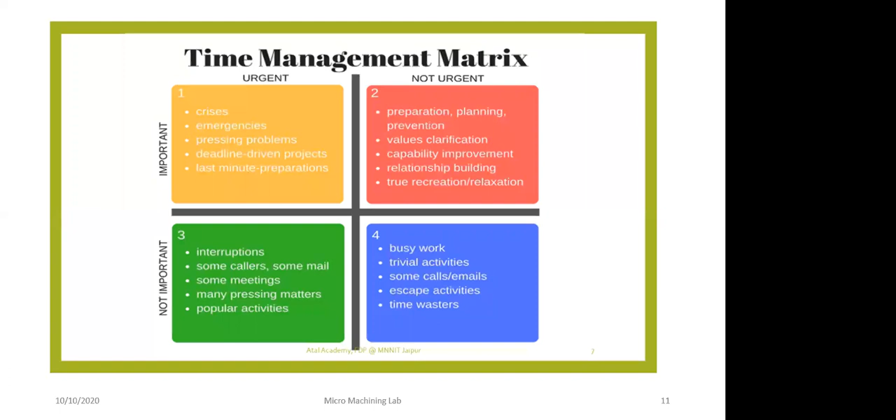Every day, start putting this table together. When you do this, you do clustering of your events, what you are supposed to do. Once you do that clustering, you will know how much time you can allocate for each event. From here, you will realize that time management is very important. For doing innovation, time management is important, and we are trying to develop so many things.

Here are two processes I would like to bring in front of you. The first process is incremental forming. Incremental forming is a metal forming technique which is exhaustively used for sheet metal forming. Here we don't use a die, we don't use a punch, but we use a forming tool where the tool end is circular and has point contact.

So you keep a die or something else and just allow the forming tool to move on top of this die, creating a shape just like machining. So look at it - without a die, without a punch, you are able to make profiles or sheet metal parts. This process is called incremental forming, and it's one of the most flexible processes, where the batch size can be thought of as one.

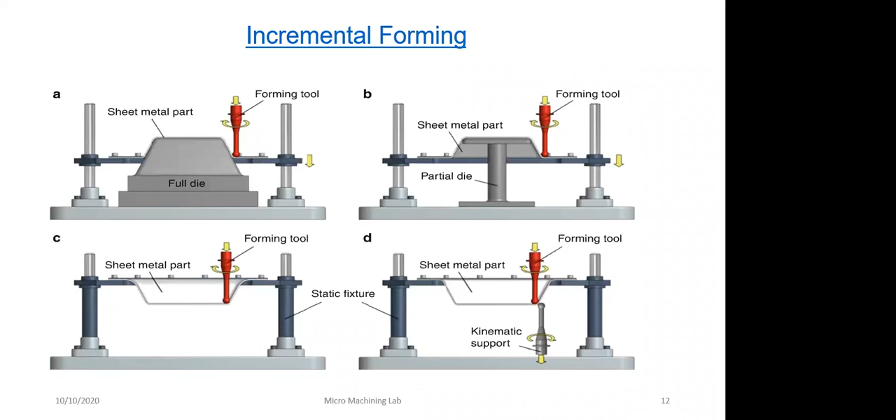The next one is rapid prototyping, which was initially called that, but now the name has changed and people have started calling it rapid manufacturing. In rapid manufacturing, people are trying to produce whatever the part is - not a prototype, but the final part itself. This makes it much more interesting and makes the batch size one. It is not one technique, there are several techniques under it.

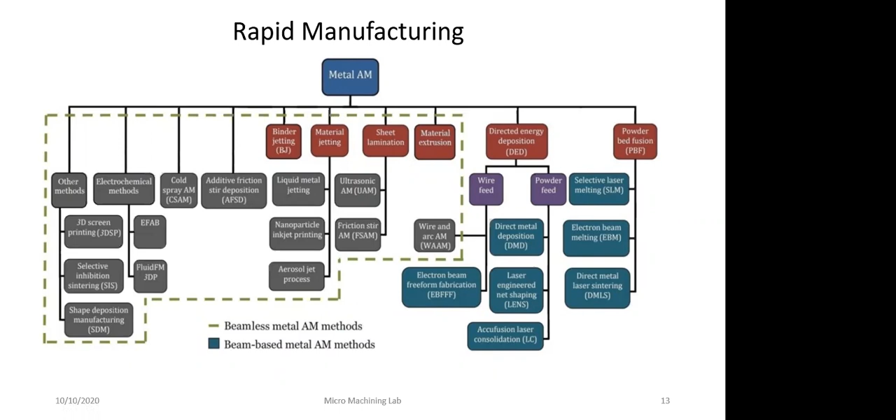They are classified as beamless metal additive manufacturing and beam-based. Beam-based uses electron beam, laser beam, or ion beam. Beamless is basically where an adhesive is dropped and joins the powder, and then we take it for a sintering process to get the product done.

Today, if you look at a conventional product, after doing topology optimization and other things, we are trying to make products of a different kind. The product shape completely changes. It is now able to work at very high functionality, the geometry is changed, and we are trying to make lightweight, high strength, highly functional, multifunctional products to meet the requirements.

Whatever was the core area filled by metal, now we have made a unit cell concept and we raster it, producing it inside. So this part will be light and multifunctional. Conventionally, a 450-gram plastic part, after topology optimization in additive manufacturing, has reduced in weight to 315 grams. So the weight is reduced, the functionality is enhanced. All these things are possible by metal printing.

This is the next important thing. I'm just introducing two processes in front of you: one is incremental forming and the other is rapid manufacturing. Here, typically, the batch size is one.

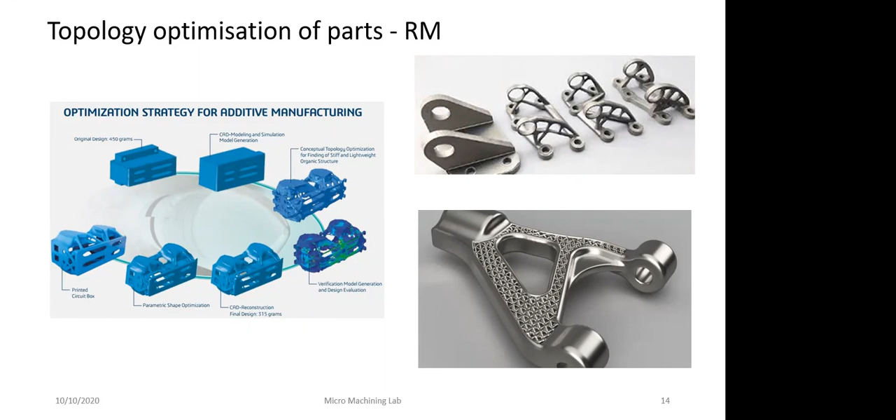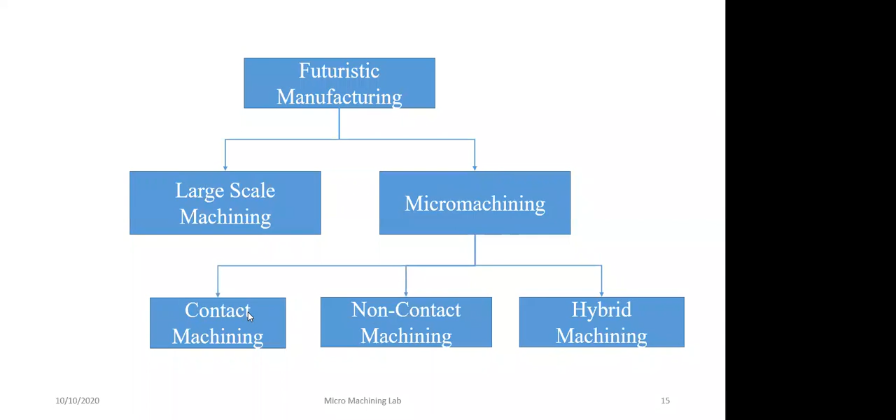These are all more towards futuristic manufacturing. When we talk about futuristic manufacturing, there is large scale machining and micro machining - two divisions there. When we talk about micro machining, again you have contact machining, non-contact machining, and hybrid micro machining.

Why are these micro machining processes very much used? Because we would like to have textures made on surfaces. The textures made on surfaces give you wettability property enhancement, thermodynamic property, optical property, surface coloring, cell adhesion, and reducing or enhancing tribological behavior. For doing all these things, we try to make very small features - the feature size is less than 100 microns on a very large surface.

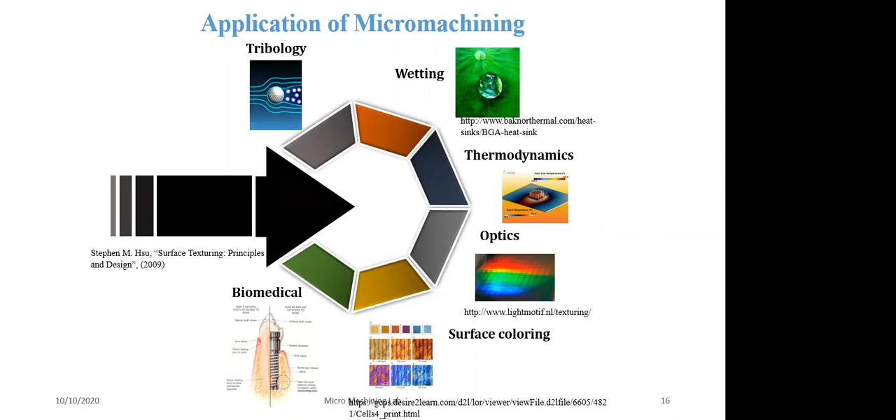So now, what are we talking about for large surfaces? Solar panels. On a solar panel, if you make these textures, you are able to retain it for longer and improve the efficiency. So where did we get this idea? We got this idea from Mother Nature.

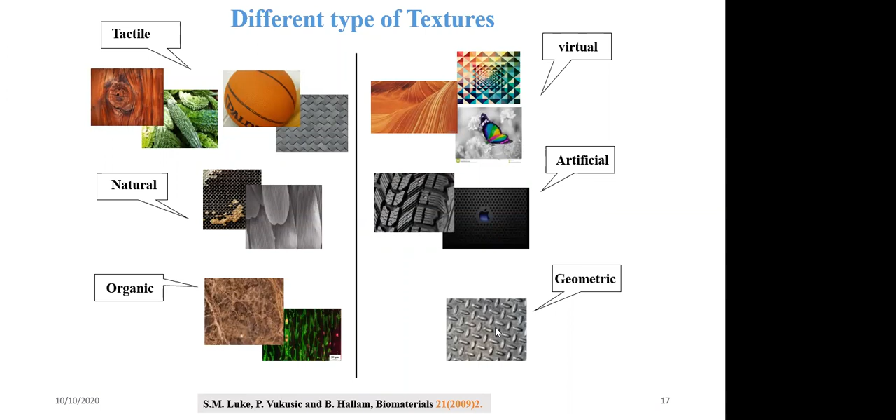If you look at Mother Nature, bitter gourd has textures, butterflies have textures, organics have textures. You can see tire and apple designs - these are concepts artificially made, all mimicked from nature. This geometric pattern you can see on lift stands and other frames - so everywhere we are trying to use this concept.

When we talk about machining of large area textures, we also copy the profile of a snake. If you look at a snake, all the textures are oriented towards one direction. Understanding this one direction and trying to mimic the texture, we have made laser texturing on top of polymer surface and metal surface. We are able to get friction resistance as well as anti-friction resistance very fast. These textures are copied from Mother Nature, and we started using this for several applications.

Today you will get shirts which you don't have to wash, hydrophobic repellent, and mobile phones. These concepts are stolen from the lotus leaf.

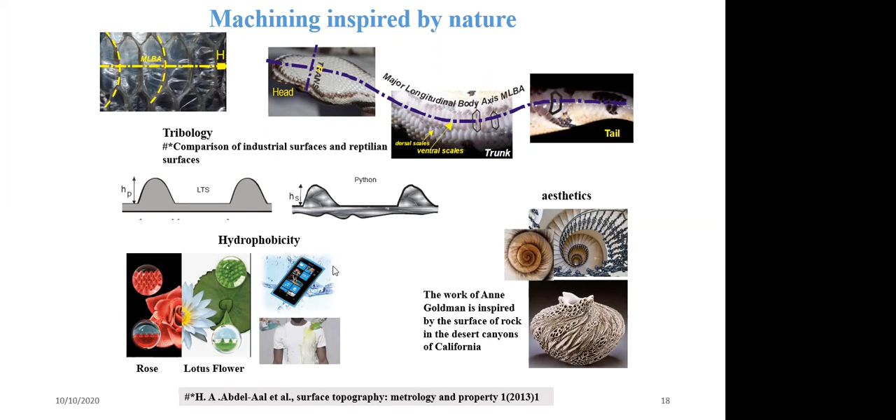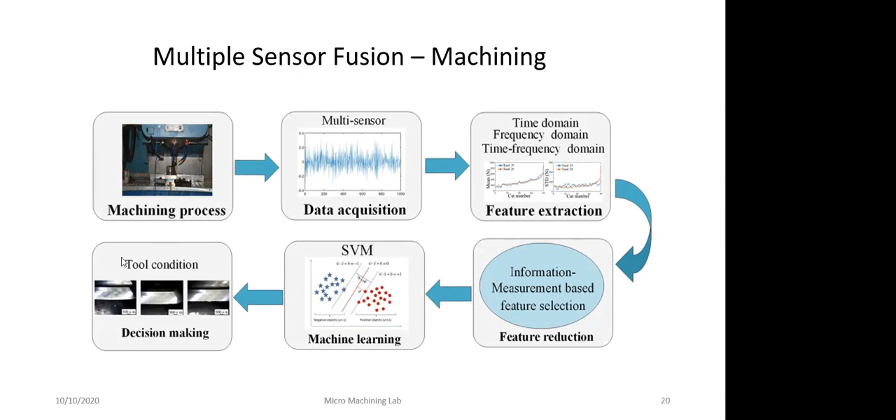Earlier we were only looking and then machining. Now we are trying to integrate, like what sir was saying, deep learning, machine learning, and artificial intelligence into the machining process. We will try to have a multi-sensor approach, acquire the data, extract data, convert it into vector methods, select, and from there figure out when did the tool break, what is the tool response, what is the tool wear. So multi-sensor fusion will be integrated into these machines to meet those requirements.

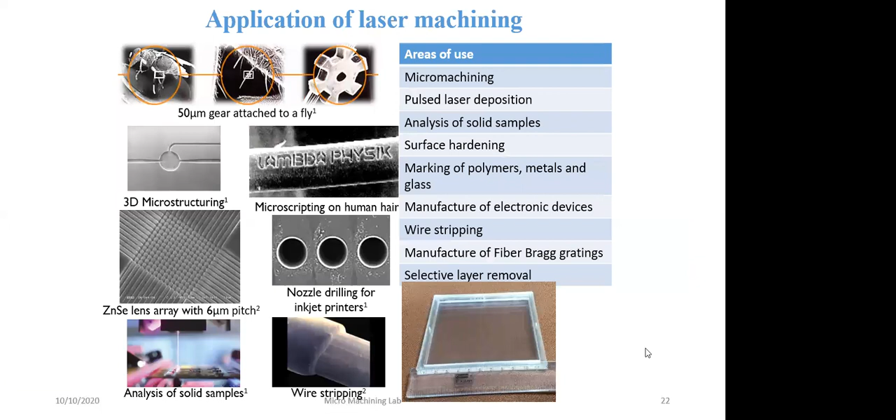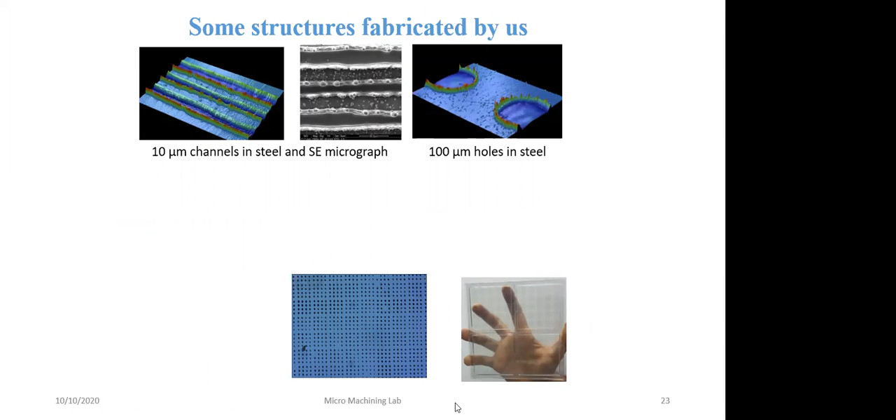When we look at laser, here we have developed a textured pattern on a transparent sheet. You can see the finger there, but on top of the finger we have made some textures. This is used for strategic applications, and this has been accepted by the Indian Air Force.

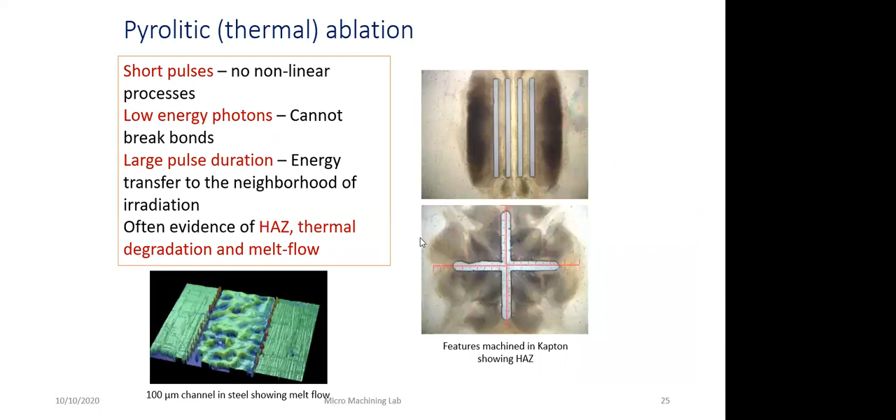When we talk about the other things, these are the textures we made. This laser process is also a batch production technique. They can be used for laser writing, and they can also be used for projection technique, laser projection techniques.

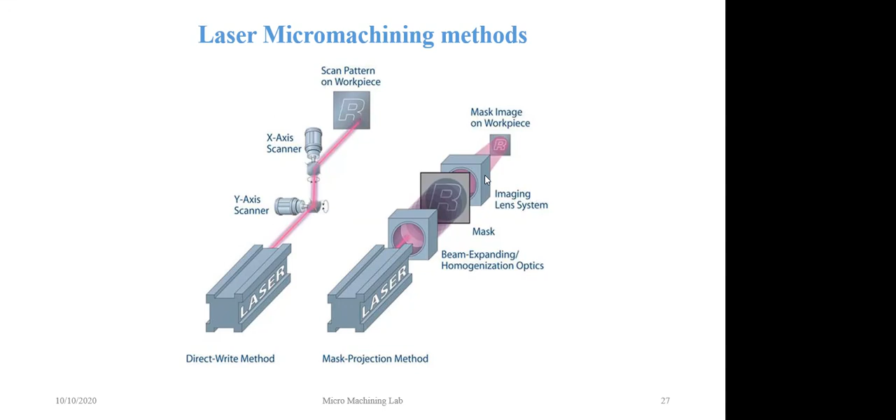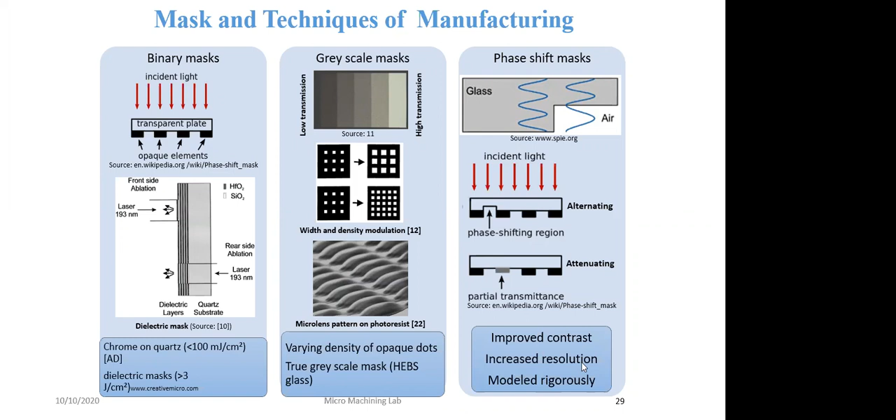When we talk about laser projection techniques, we will try to have a binary mask, a grayscale mask, and a phase shift mask. You can see any kind of textures can be made, wonderful textures over a large area. We are talking about large areas, few millimeters, few centimeters.

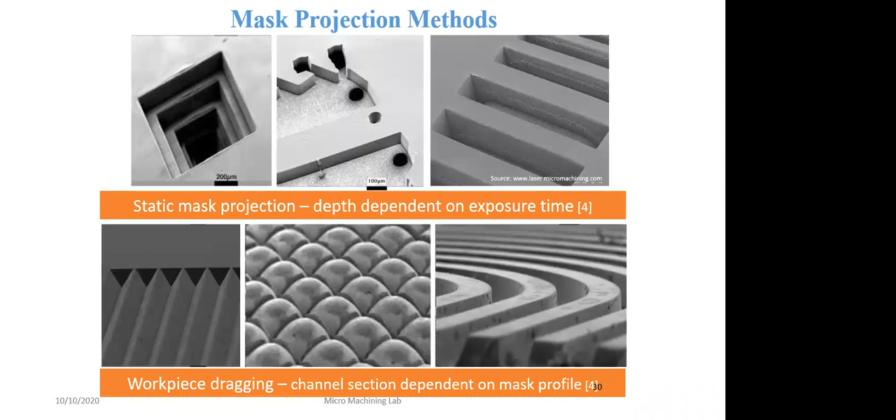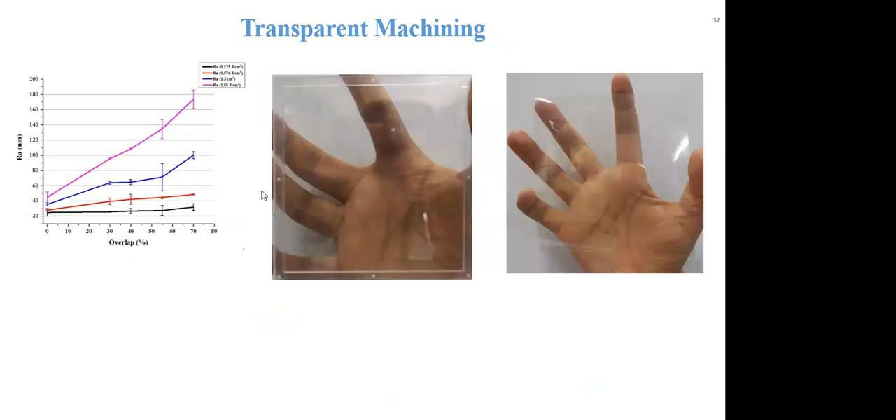I think I have covered majority of what I wanted. These are all more in-depth studies, so I would just like to close it up and then ask for questions if there are any.

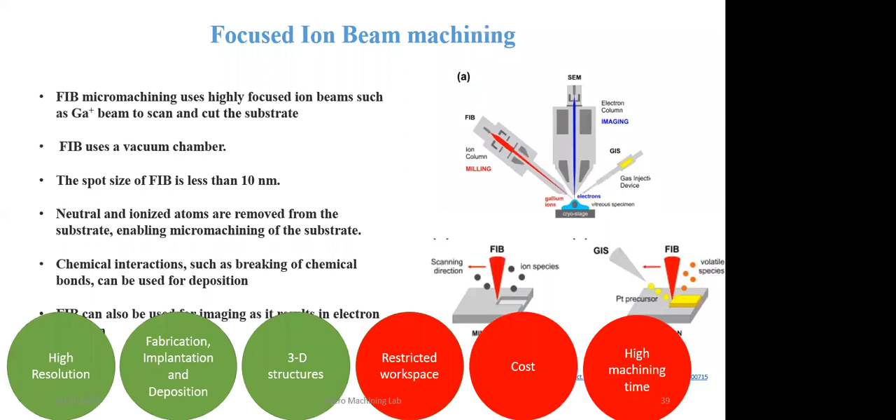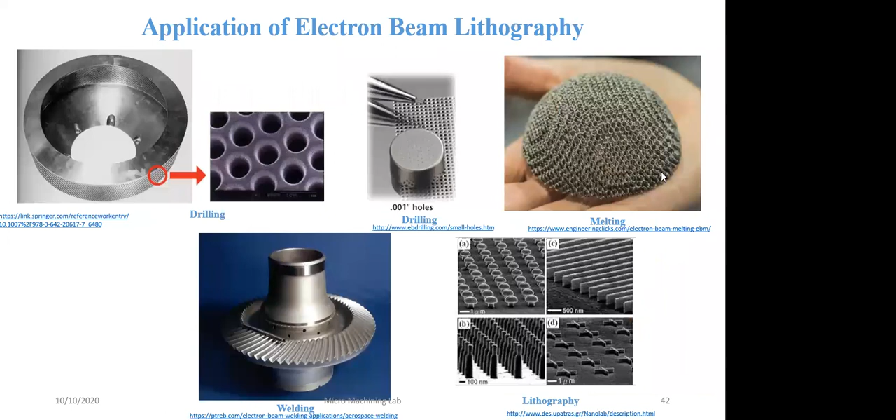I have so many techniques here, but since I'm running short of time, I thought I will just skip it. I am open for questions if there are any.

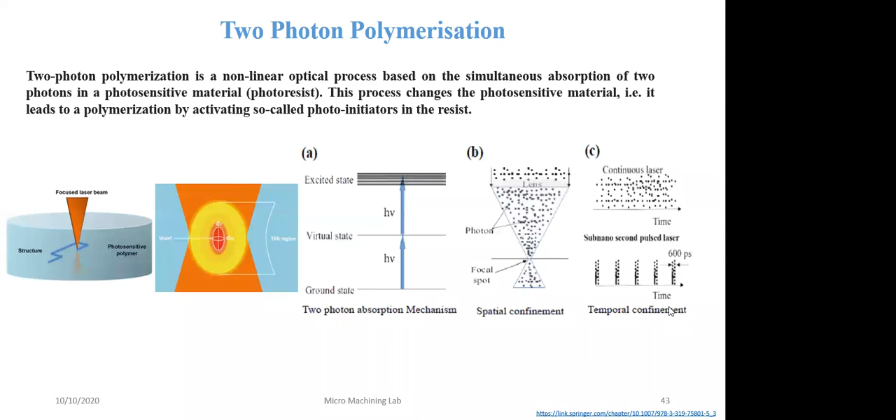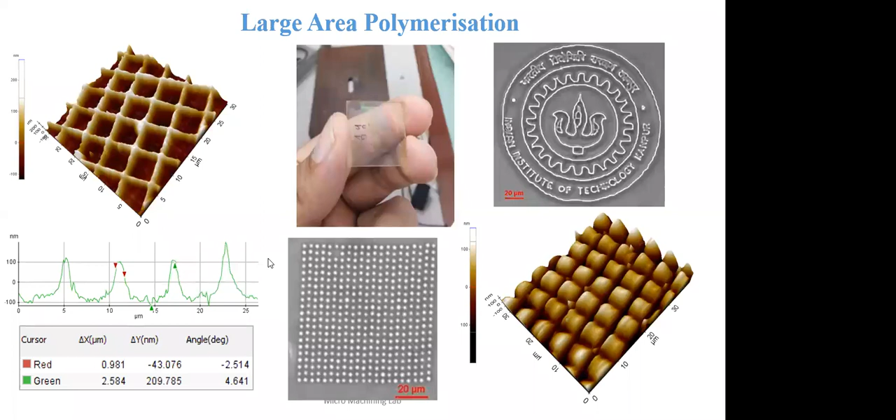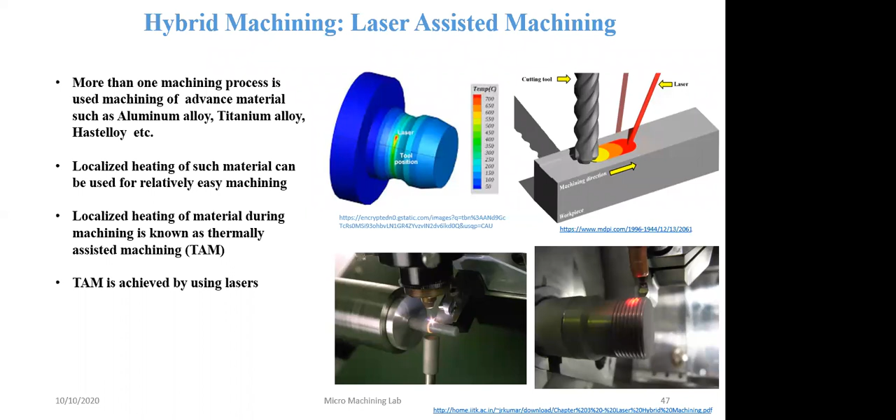The last one is hybrid machining processes. Here we are trying to integrate two different processes - laser and turning, laser and drilling. These are some of the examples which we have done.

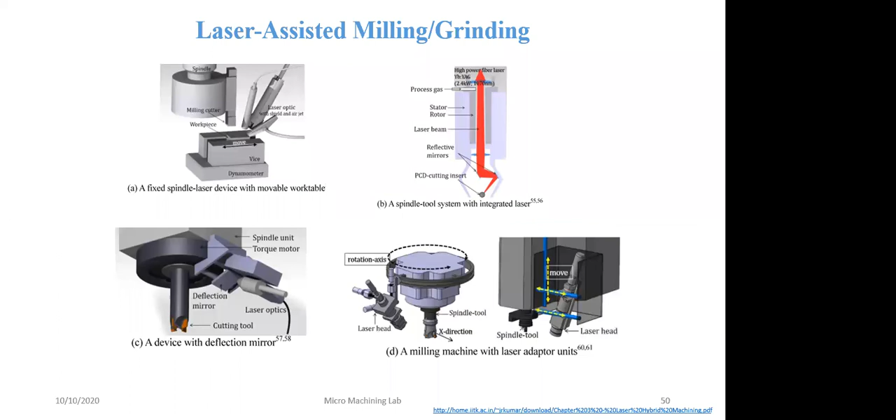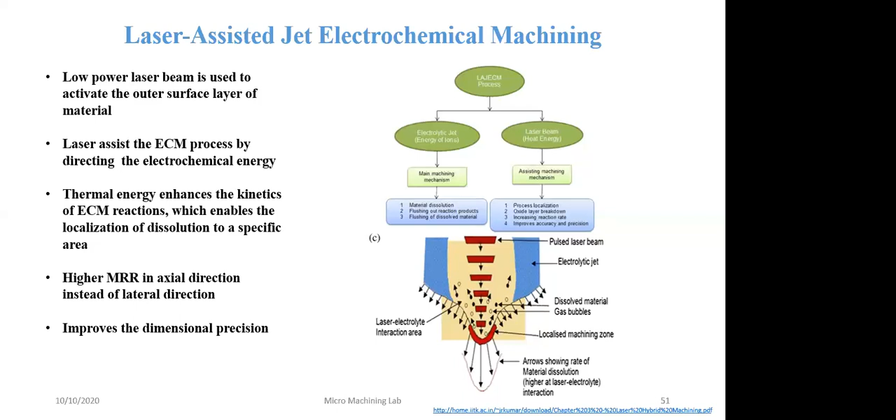Laser for milling, laser for grinding, laser for inspection is also used, and laser is also used for electrochemical machining. Depending upon your requirement, the processes I'm using here - laser, incremental forming, rapid prototyping - they all can be used for a batch size of 1.

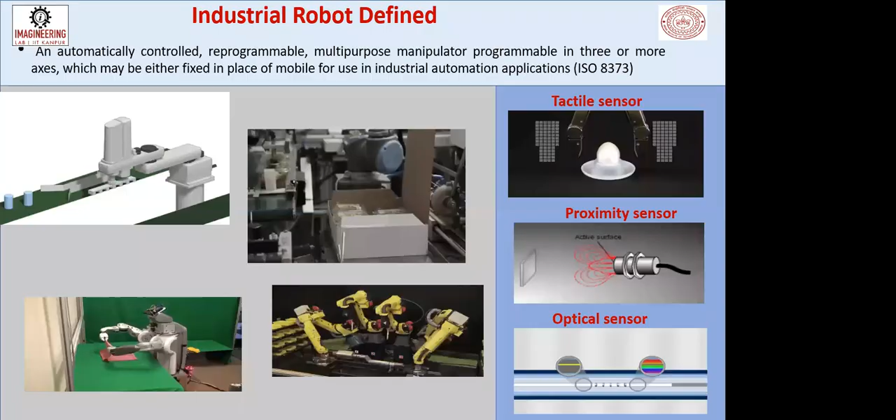This was what sir was trying to cover, IoT and other things. I would like to cover here and then come for questions if there are any.